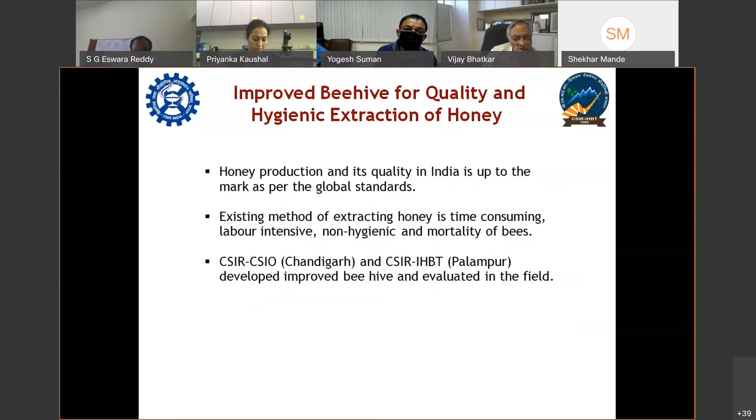Why improved beehive? Compared to the traditional beehive, the main advantage of the improved beehive is no mortality of bees during extraction of honey, whereas the traditional method causes mortality of bees during extraction and handling. In our improved beehive, it is time saving with less human intervention, whereas the traditional method is time consuming, requiring manual extraction using a honey extractor. In the improved beehive, hygienic and quality honey is extracted without wax, whereas the traditional method yields non-hygienic, poor quality honey with lots of impurities. The improved beehive yields 30 to 35 kg or more, depending on availability of flora and season, compared to 20 to 25 kg or more in the traditional beehive, also depending on flora and season. The improved beehive is also cost effective.

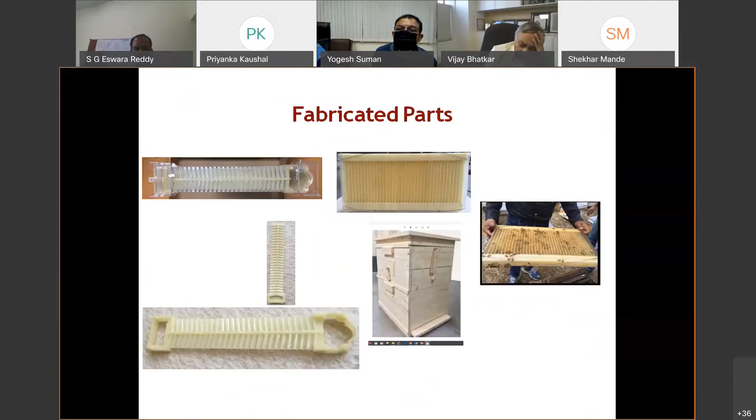Here you can see how the honey harvesting system works. The mechanism is designed to understand the natural behavior - you can see the natural behavior frame, that is the wooden frame. On the right side is the design of the mechanism, where frames contain partially formed plastic honeycomb lattice with vertical gaps that are filled by bees with pollen and nectar. When it is filled, then it will seal.

When we want to harvest, you can see the array of breaking of the closed hexagonal structure. When the honey is ready, the alternate half of the cells get misaligned by breaking out the wax seal, and honey flows down into the channel at the base of each frame. I will demonstrate that the pipe automatically brings it to the bottom. When these hexagonal cells are misaligned, it forms a zigzag path for honey flow - this is how the honey flows and directly falls to the bottom.

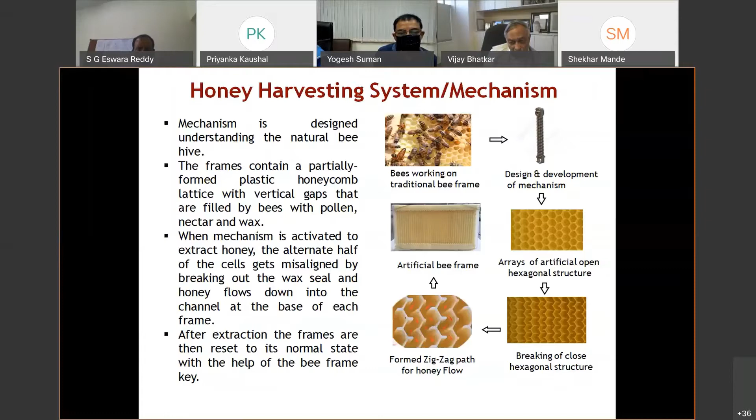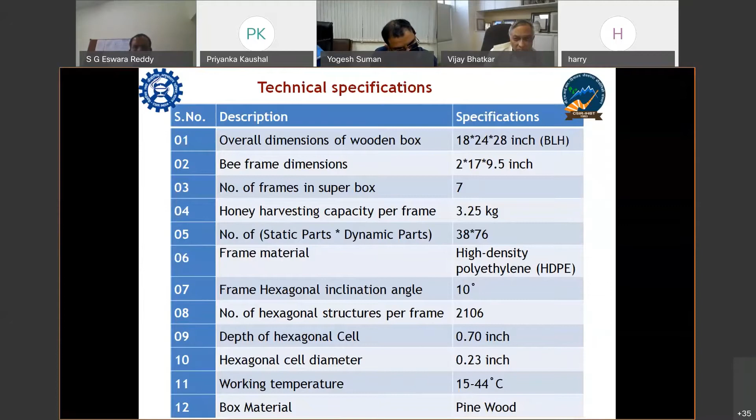Here are the technical specifications: frame dimensions, number of frames in super box is 7. Honey harvesting capacity is up to 3.25 kg. The box material is made of pine wood, and can be made depending upon the availability of the wood. Here you can see the now improved hive.

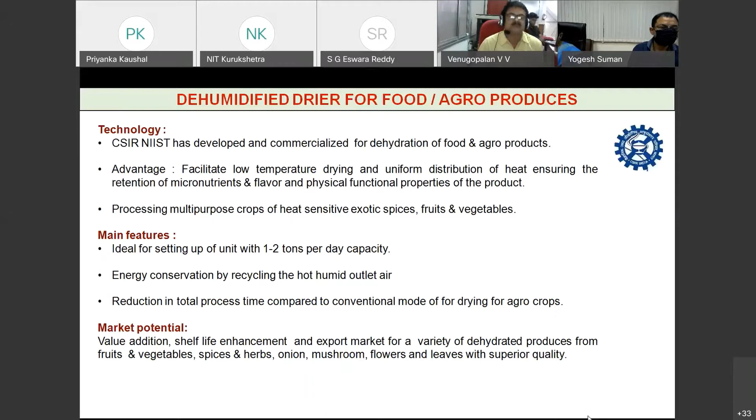This is one of the working models we have in our laboratory, a pilot plant. We can see the technical features of this unit. It comprises a refrigeration unit, a PID controller, drying chamber, and a heat exchanger.

The working principle is like this: the humid air from the dryer outlet is first passed through a heat exchanger, shown as number 4 in the figure, and it passes through an evaporator coil also. There happens a heat exchange between the refrigerant of this evaporator and the humid air, which results in condensation of this moisture. Continuously, this condensate water is removed from the system.

While condensing, this latent heat of condensation will be transferred to the refrigerant present in the refrigeration unit. The latent heat will be absorbed by the refrigerant and compressed further using a compressor, and that heat of compression also will be transferred to the air. This dehumidified air will then be recycled along with the fresh air to the drying unit.

This involves drastic energy conservation. We can see some of the products dehydrated through this dryer, which ensures all the physical properties of color, flavor, essential oil, etc. are preserved. The first one is nutmeg, second is cardamom, third is a leafy vegetable like spinach, and the fourth is carrot.

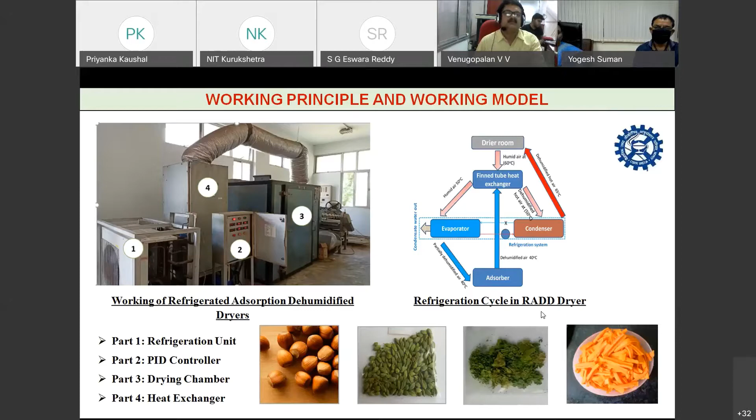We already compared the data generated using this dryer with other models like conventional tray dryers and fluidized bed dryers. What we can see is that if the raw material has heat sensitive compounds or bioactives to be preserved, like essential oils or flavors in spices or coloring materials, the better choice is the dehumidified dryer. If it's rapid drying without heat sensitive materials, you can go for the fluidized bed dryer.

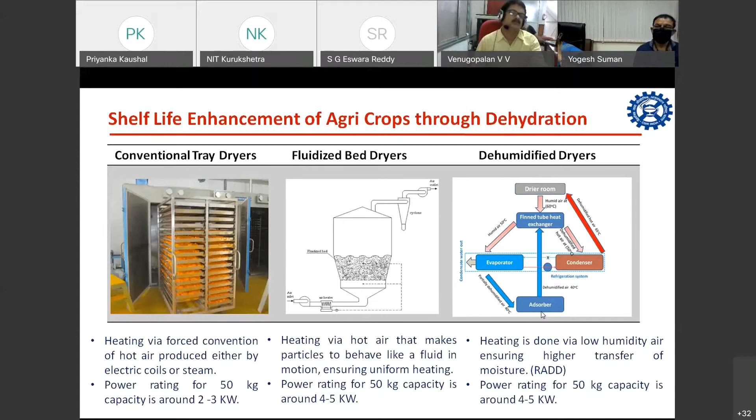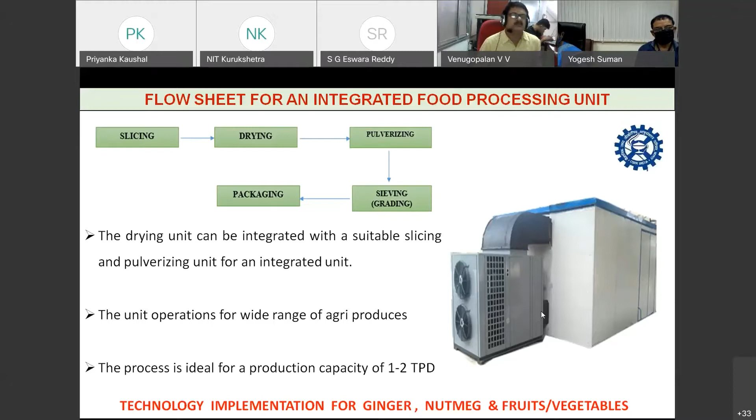The other equipment to be integrated with this are a vegetable or fruit slicer. If there is a spice, there will be another type of size reduction or cleaning and washing unit. Then our drying unit. After that, if it's a powdered product, we have to go for a pulverizer. Otherwise, we can directly go for a packaging unit. So the drying unit can be integrated with suitable pre-treatment and other equipment.

So what we are offering is technology transfer, process demonstration in our pilot plant facility, and we also give industries test market services for their product marketing. We make the DPR, then consultancy and implementation of the project. We also do, in some cases, turnkey implementation, and assist project implementation agencies during erection and commissioning stage, and also post-commissioning assistance, product analysis, and training, etc.

This is the picture of our first project implementation. It was for nutmeg, as I told. The company was initially using sun drying and other conventional drying mechanisms, which were creating a lot of issues through the development of aflatoxins, and they were unable to export the product.

So finally, when we introduced this dryer concept as part of a sponsored consultancy project, the industry was able to make much better quality product without any oil leakage, with maximum oil content, and there was no development of aflatoxins in the product. They became the number one exporters in the country within a few months. In the first year itself, their turnover jumped from 5 crores to 12 crores after implementing this plant.

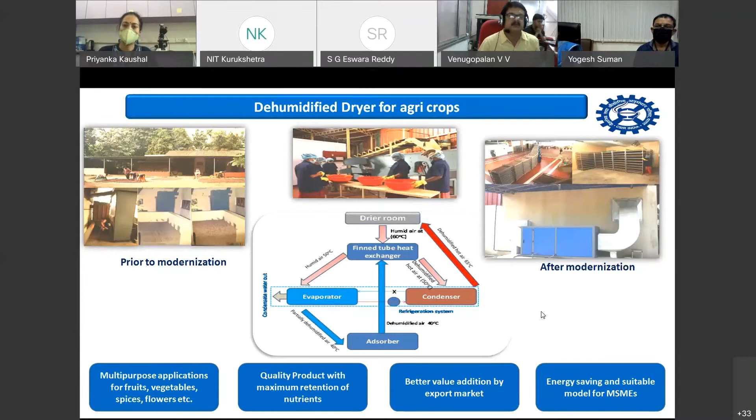The capacity was 2 tons per day. This is the plant picture before modernization, showing the conventional mode of drying. After implementing this, we also did some mechanization, and the plant's capacity improved tremendously because of a drastic reduction in process time. Conventional drying operations took about 36 to 42 hours. After introducing this dryer, the drying time was reduced by more than half, to 10 to 12 hours.

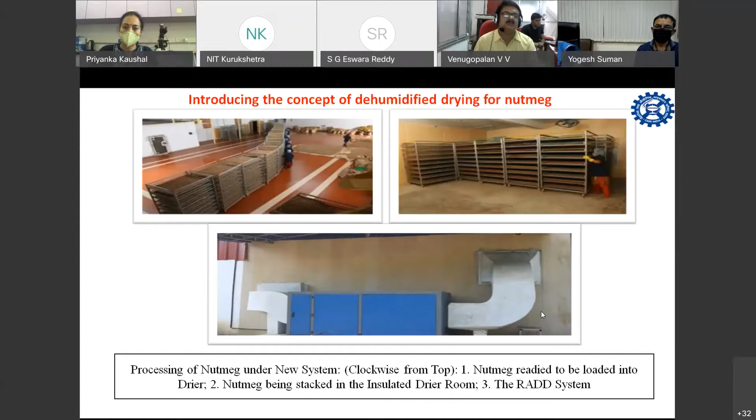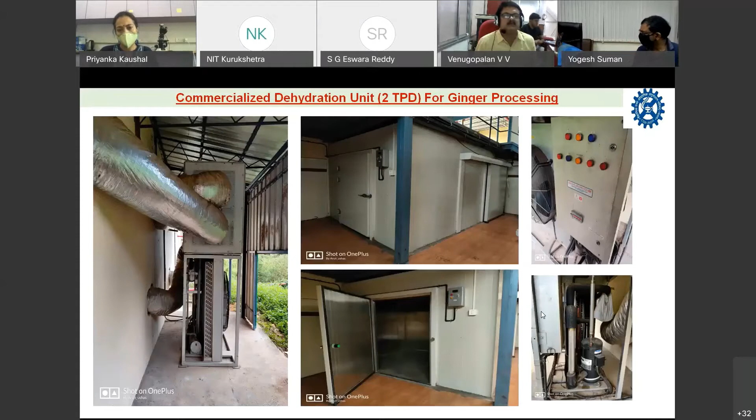This is the second unit we implemented, at a ginger processing facility in Wayanad, Kerala, with a capacity of 2 tons per day. First, we take the ginger juice out after crushing, and make essential oils from it. The residue created is used for making ginger powder after dehydration with this unit. With other models of drying, there was a drastic reduction in the oil content present in the fresh ginger, and the fresh aroma also got reduced. Because of this RADD unit, the quality was much superior and oil retention was very high.

Coming to the costing of this technology, we find an investment of approximately 40 lakhs is required for making an integrated processing facility, making use of other equipment as well.

The dryer cost itself may be around 25 lakhs for 1 ton, 500 kg to 1 ton capacity, depending upon the moisture content of the product. Other equipment like slicing, grinding, sieving, packaging, etc. is required to make a full-fledged plant, which we can implement through a turnkey or consultancy mode.

Similarly, for a similar kind of plant, we also worked out the production cost per day capacity. It's coming around 35,000 something. But on an average, if you process 1 ton, we'll get at least 300 kg of the end product.

If it is a high value product like cardamom, the fresh raw material itself will cost around 300 rupees, but the value addition is much higher. The dehydrated cardamom has a cost of 800 rupees to 3,500-4,000 rupees. That value is fully for the color retention.

With this superior model of dryer, we can 100% ensure the green color. So it will have a tremendous value addition, graded at the supremest quality of cardamom. This kind of value addition can be achieved through proper selection of raw materials of the specific region.

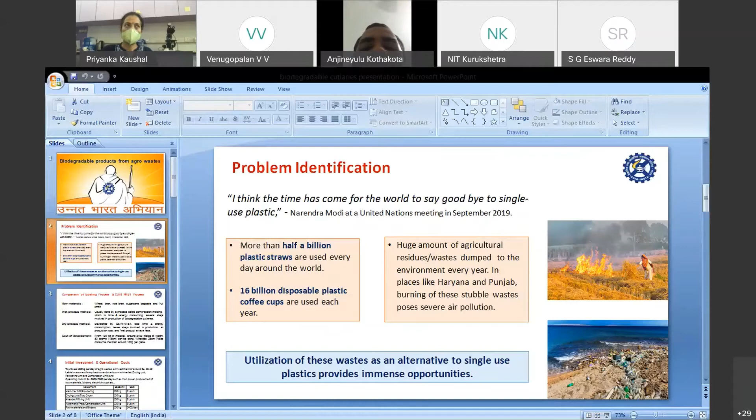We dispose of plastic cups, coffee cups every year, and also 500 million plastic straws are disposed of. For that reason, we started working on these agricultural biodegradable products, using 3 to 4 raw materials, including rice bran, rice husk, and different kinds of raw materials available in the outside market.

So we started to produce by small scale people like women empowerment, especially small households. They can run this processing in their home, with their own field for that purpose. These are the biodegradable plates, and I am showing pictures of biodegradable plates.

This is the advantage and salient feature of our technology. Mainly, it can be used by rural area people and agri-entrepreneurs who will invest less. Even small people can start with very little investment, and marginal companies already in plastic industries that are shutting down can also run this business. One major advantage is that this product degrades within 30 days, and the degraded product can be used for fish manure and poultry feed, because we are using only agriculture waste, nothing harmful.

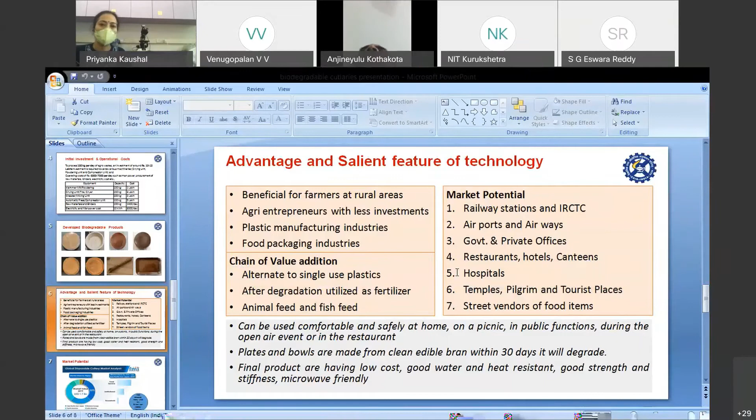The main market potential is railways, railway stations, IRCTC, government and private offices, airports and hospitals, because these are crowded areas that require a huge amount of plastic, especially single-use plastics, every day. Another value addition is that it's an alternate to single-use plastic and can be used for fertilizer. The major advantage is that being wheat bran based, we can even consume it - that's why we started using several flavors for consumption purposes, and it's not harmful for human beings when based on wheat bran. But with other raw materials we can't consume it, only degrade it.

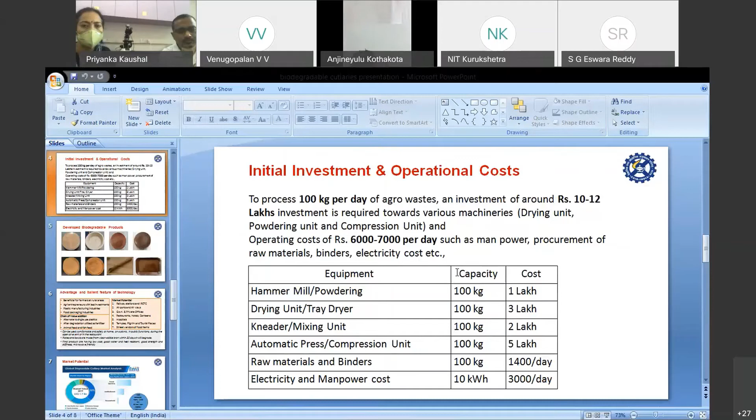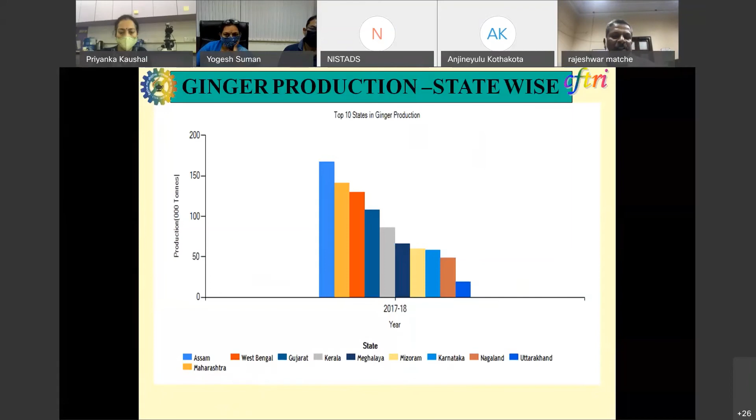This is the ginger. India's production is around almost 10 lakh metric tons, and it usually takes 20 to 24 days for drying.

These are the value added products: bleached ginger, unbleached ginger, salted ginger, ginger preserve, ginger candy, ginger paste, and ginger powder. Most of these 6 to 8 technologies can be prepared at rural home scale itself.

What we are discussing here is only ginger paste preparation. It involves washing, three important methods: washing and size reduction, pasting, and thermal processing.

This is a typical flow chart for ginger paste preparation. Take fresh ginger rhizomes, do overnight soaking in a steeping solution to reduce contamination, then the cleaned ginger can be size reduced and peeled to remove the skin, followed by sorting, wet grinding, mixing with ingredients like salt or acidulants, fine grinding, and packing.

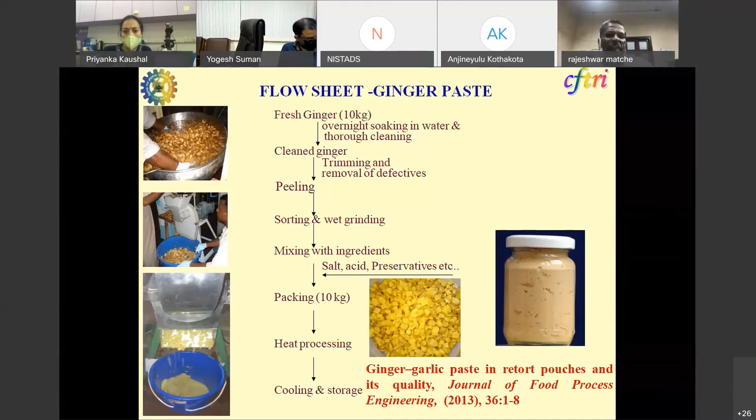After cooling, the ginger paste characteristics are a viscous product retaining the strong flavor of the raw material, namely fresh ginger. The volatile content in the product is influenced by factors such as variety, raw material storage, and processing conditions. The product is generally creamy white or off-white in color, and is microbiologically stable and free from pathogenic bacteria.

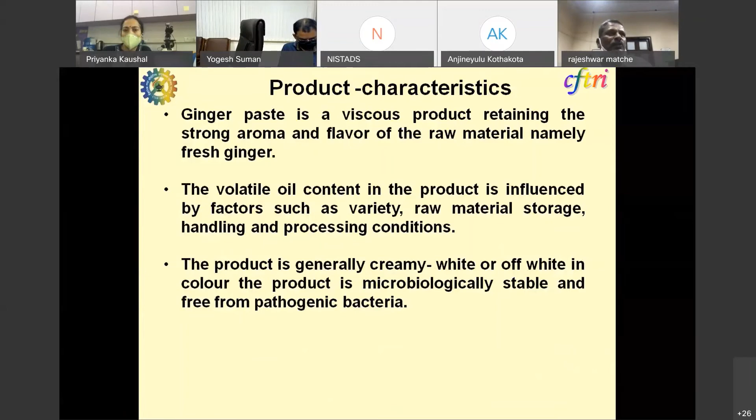This is how it is used. Ginger paste is mainly used as a spice in culinary preparations for imparting the characteristic fresh ginger flavor. It is a ready-to-use preparation that can replace ginger in homes, restaurants, and institutional caterings. These are the plant, machinery, and equipment required: principal equipment and auxiliary equipment.

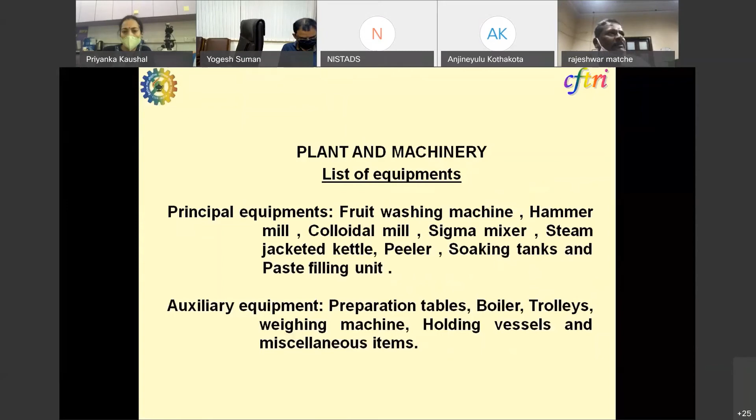We have a small video to show. This is an industry we have already transferred the technology to, Agarosa industry in Kerala.

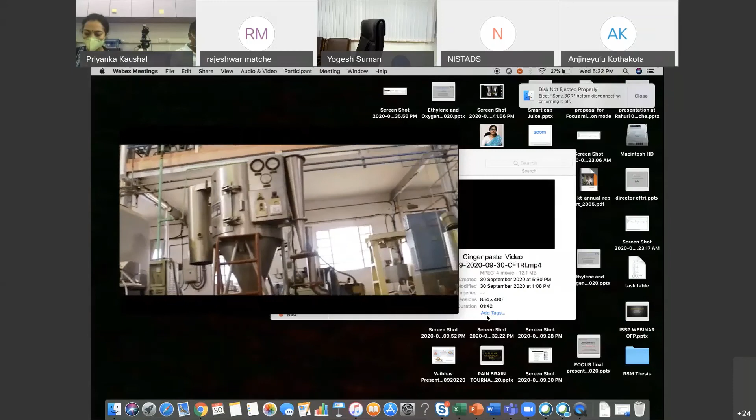It is mostly influenced by the volatile oil content, variety, handling and processing conditions. The product is generally creamy white to off-white in color, microbiologically stable, and free from pathogenic bacteria. This product is packed in glass jars.

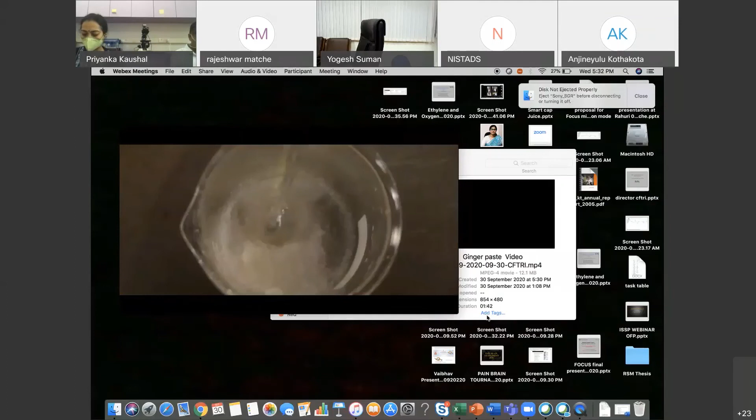Preparation of this ginger paste requires raw material. Ginger rhizomes are the major raw material. Preferably low fiber varieties with high volatile content are preferable, particularly 0.2 to 0.4% volatile oil in the fresh rhizomes. These rhizomes must be of good quality and free from infestation and discoloration.

Other raw materials required are salt and acidulants. Usually this ginger paste is used in culinary preparations to obtain the fresh ginger flavor, and it is also used in preparations where fresh ginger is required, in homes, restaurants, and institutional caterings.

I think this is a very important and very good technology for the Northeastern states. So if anybody is available from the Northeastern states, from our RCI coordinators in the Northeast, if they would like to ask anything.

Professor Limfa, if you're there, or NIT Manipur, NIT Tripura, IIT Guwahati. I see a very good case study through this technology. Probably we can have an independent discussion with our Northeastern RCIs and PIs, because I see great potential in this technology.